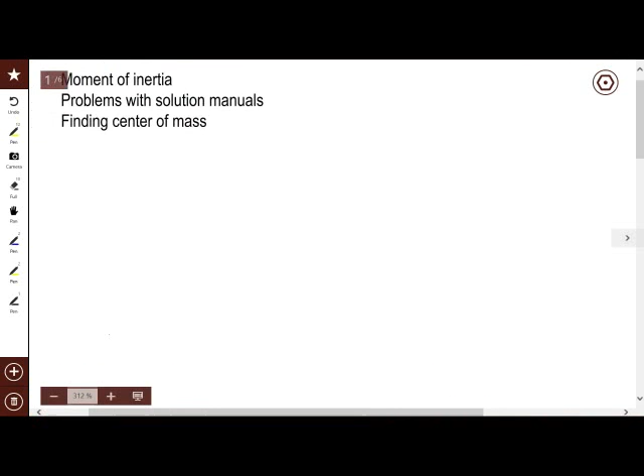All right, let me ask you some things here. If I were to take a mass — okay, if I were to take a ring, a piece of metal, and bend it around, put some spokes in here just so it'll stand up, and put a hub on there, and spin it. This has a radius of, say, 1 foot, 1 inch, whatever, and it's 10 pounds. Can you imagine that?

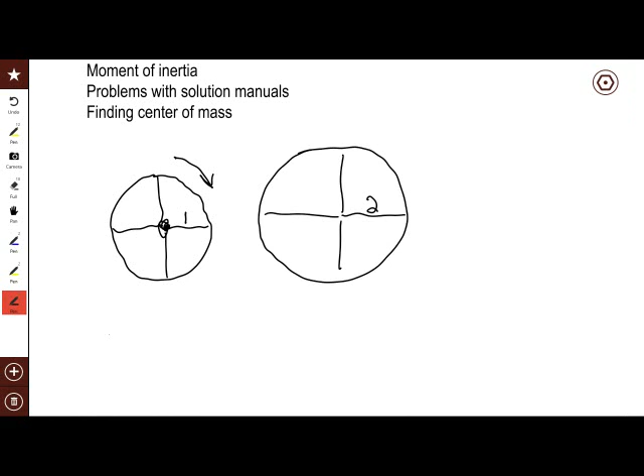Okay, and then what I do is I take another 10-pound ring and do the same thing with it, but this time I have a radius of 2. Does it have a hub? It has a hub just like the other one — I'm not trying to fool you, but good point. So it's got a hub, I'm doing the same thing to it. All right, and here's what I want to know, and if you have your clickers, we'll see what you think.

Number one is the left guy, number two or B is the right-hand guy. What I want to know is which one of these would be harder to speed up in spinning. They're sitting at rest, and you're going to come up with your hand and start turning them. Which one would be harder to turn to get started, the little guy here or the big guy over there? It's the same weight, just a different distance.

Yeah, click in, click in. Tell me what you think. Did it work? Okay, oh yeah. Well, it's a small screen, but anyway. Everybody weighed in?

The left would be number one, and that one over there would be number two, or A or B. Are you turning it from the edges? Turn it from wherever you're going to turn it, you turn it the same way, whether you're on the rim or in the center. We're in the center, we're going to grab a hold of it right here, and we're going to go like this.

I'm probably asking it wrong. Okay, so this is going to be mostly a... were you here? Okay, so let's see what y'all are saying, if I can figure it out.

So 65% are saying B. I was hoping for a bigger percentage, right? Here's what's happening: the lighter, the shorter in this way that the mass is, the easier it is to turn. So if you got that one wrong, maybe I said it wrong, maybe I've deceived you somehow. But if you're thinking, wait a minute, that doesn't make sense, come see me after class because I want to make sure you got the right idea.

Which one is easier? You got a 10-pound ring, and it's this big around. I'm going to sit here in the center and start turning it, making it go faster, faster, faster. Then I have a 10-pound ring, but it's twice as big. Which one would be harder to speed up? The one that's twice as big. So if you got it wrong, maybe I just said it wrong. But what I want you to have is a feel for the fact that in order to get these things to start spinning, the distance that the mass is out makes a big difference. Make sense? You probably experienced it, right? The bigger the tire, the harder it is to get the thing moving.

The other thing that will give you a large inertia - inertia is it doesn't want to change, right - so what gives you a large moment of inertia is a large radius, which I just asked you about. The other thing is a large mass. So let's say you've got your arms out here at a certain distance. If I pick up some weights out here and then try to turn like this, it's harder for my body to turn because of the extra weight out there at my hands. That make sense? So you have a feel for what moment of inertia is: large moment of inertia means you've got either big mass or mass at a large distance, one or both, right? You get the idea? So if you want lower inertia to turning, you want to pull the masses in.

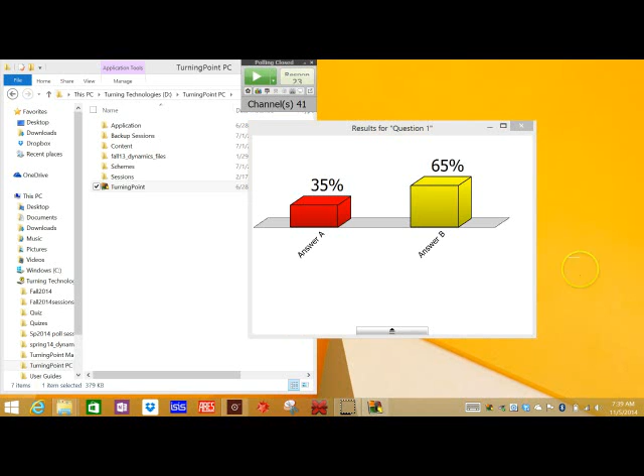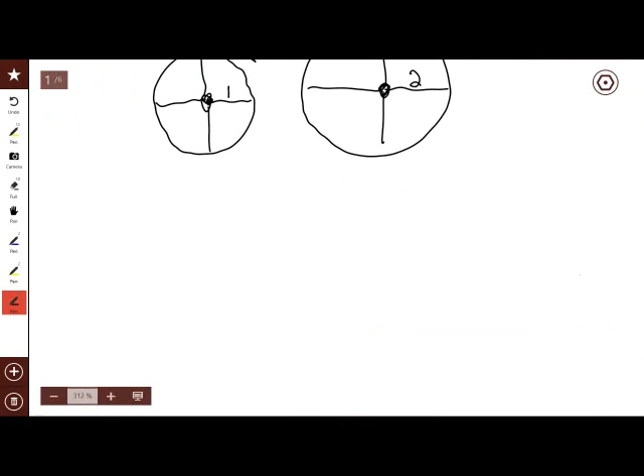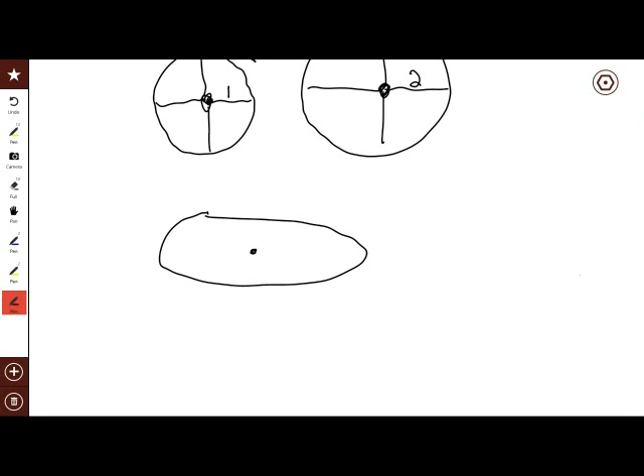Does that make sense? Okay, the other thing you need to know about moment of inertia that people are going to expect you to understand is something called the parallel axis theorem. If you have a body, any body, it's going to have a center of mass. Are you familiar with what the center of mass is? It's a balance point. Do you know how to calculate the balance point? It's the centroid - well, it's close to the centroid, but if you take the centroid and multiply by density, then you get the center of mass. For example, if this is an area, the centroid would be the center of the area, so if you cut it out of cardboard and found the balance point, that'd be the centroid. If, on the other hand, this thing over here was all gold and over here it was all aluminum, it would have a different balance point, wouldn't it?

Okay, center of mass is different than centroid, but they're very similar calculations. Got it? So you know what the center of mass is. You could do it if you had to. I'm not going to put it on a quiz, but you could do it, yes? The way you really do it in the real world is you draw it up in NX and you click a button and it gives it to you. Okay? So I'm not going to beat you with it. But everything has a center of mass.

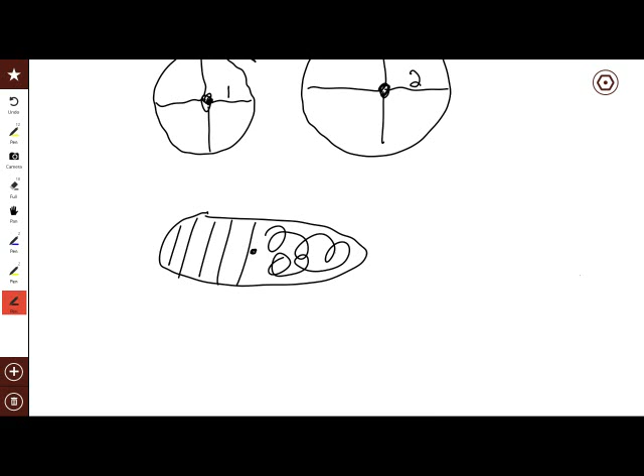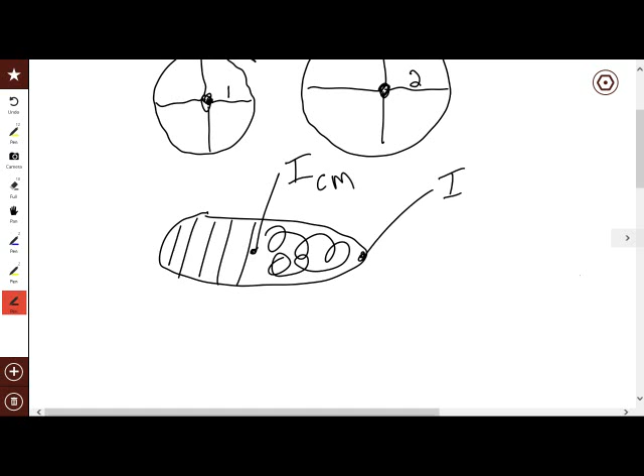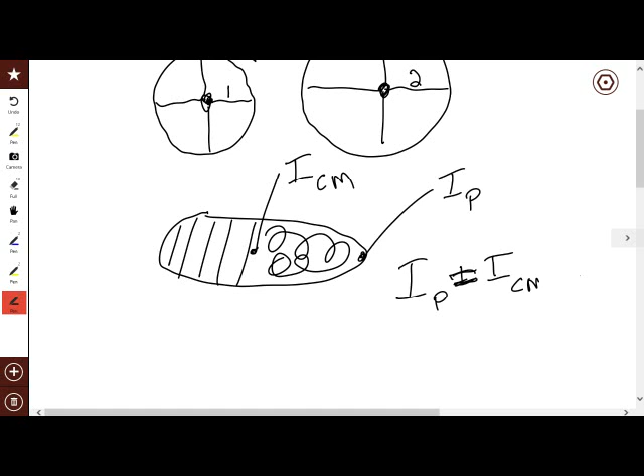Now, if you want the moment of inertia of something, say for example you have the moment of inertia about this point right here, about the center of mass, and you want the moment of inertia around some other point over here, then the moment of inertia around this other point is equal to the moment of inertia through the center of mass plus the mass times the distance squared between the two.

Okay? Not on a quiz, but you better have that in your mind when you go to work, because somebody's going to say something and you're going to say something stupid and then you'll lose your job because they'll say, man, what an idiot this person is. Don't even know how to take 2 plus 2. Okay? It's called the parallel axis theorem. And usually they'll say, well, you can use the parallel axis theorem and shift it over, and you go, right?

You need to say, yeah, I understand. I know, how do you do it? Well, what you're going to do is you're going to do it on NX. That's the way you're going to do it. Right? That's the way you'll actually do it. But you need to know about the parallel axis theorem. People will ask you about that, or they'll say something about it, and you need to sound intelligent. Got it? You will use moments of inertia, especially in Chapter 17.

You'll use them on the test. I will tell you the formulas for them. Okay? You all had Calculus 2, I'm sure, or at least doing it now. And in Calculus 2, they are doing things like having you integrate to get the center of mass, or centroid, or whatever it is, and they're having you integrate to get the moments of inertia. Right? It's agonizing, isn't it? That stuff is, I mean, that's the stuff that I had to do. Man, we don't do that anymore. We just don't. Okay? So why are you taking Cal 2?

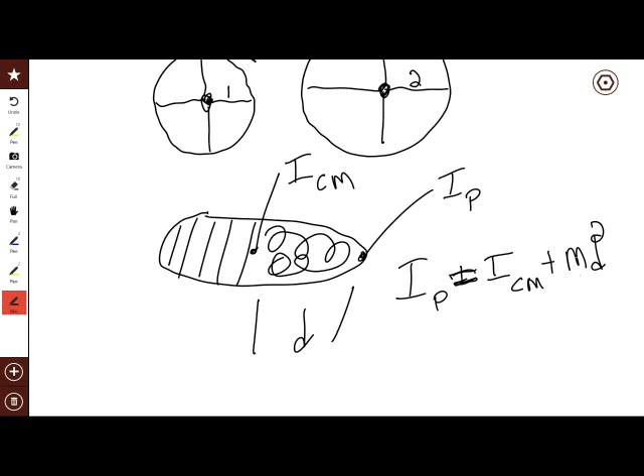Here's another issue, and this is, I could care less if you use the solution manual. I really don't care. You're not supposed to, but I don't care. I'm not going to rat you out. I'm not going to come get you. I don't care. It's a learning tool. Use it. Here's the problem you're going to have.

In Chapter 17, the author does problems different than what I do. I have done it his way. I've done it in classrooms when the professor made me do it, and I've done it in real life. I'm telling you, it does not work. Well, it works. It works. It's confusing for almost all problems.

Very simple little problems that I would make up in a book that I publish, you can use the technique that the author's got. Okay? It doesn't work for everything. Well, it's confusing. See how confused I am already? Right? It's confusing to use that technique.

What I'm going to do is I'm going to do like I've always done. I'm going to say there's one way to do it. Here's the one way you do it. It works every single time. You can do what you want.

So when you're doing your homework, if you got a copy of the solution manual and you open it up and you say, man, this stuff doesn't look like anything Everett's doing, you're right, because I don't do it that way. Okay? If you want to do it that way on the test, that's fine. I'll grade it that way. But the odds are, and I've seen this historically, because I've taught this class for a long time, you're going to mess it up. You're going to try to use it.

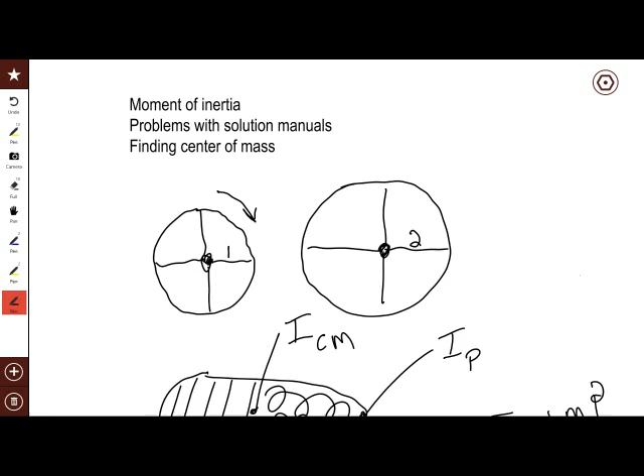Is that good? Okay, all right, so basically the difference in this particular—tell you what, let me just ask you, let's read this problem and you tell me what the difference is. What's the difference between 16 and 17, okay?

So read this. The cart is given a constant acceleration of 6. Determine the force developed in the rod AC and the horizontal and vertical components at the pin B. The crate has a weight of 150 with a center of gravity at G, secured to the platform so it doesn't slide. Neglect the platform's weight. Okay, here's the picture.

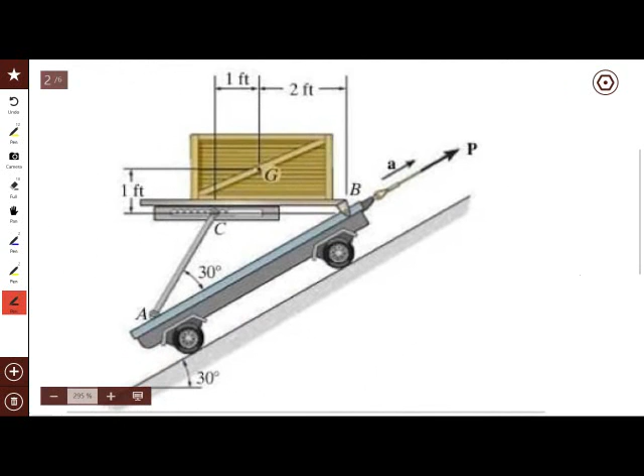Why isn't this a Chapter 16 problem? It wants a force, right? Remember chapter 12 and the difference between 12 and 13? You count the degree of freedom. All right, so by the way, how many degrees of freedom is it?

One, because the cart can go up the hill. Okay, stop the cart from going up the hill, nothing else changes. Okay, what does 1 degree of freedom mean? It means if you give me 1 double dot, I can find all double dots.

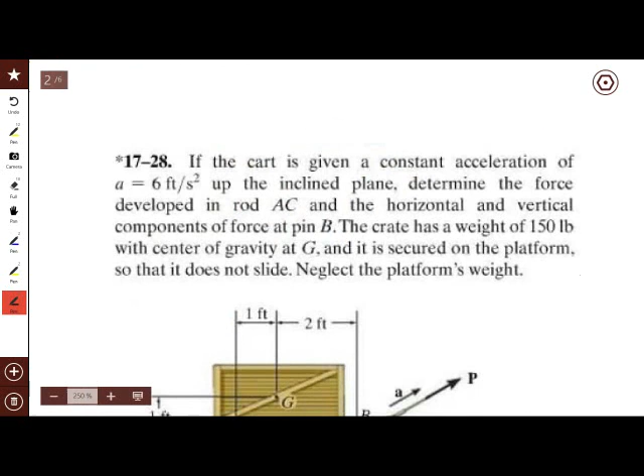Did they give me a double dot? Sure, they told me the A was 6. So I go, hot dog, man, I can get all double dots. That's not what they want. Right? So what do you do when you're faced with a situation like this?

Because you're going to have to select between chapter 16 and 17 on the next test, right? Do I draw a free body? If you draw a free body for chapter 16, you're not getting any credit. It's not like I'm going to dock you, but you're wasting your time. It's not going to take you anywhere, and there's no credit there because you're doing the wrong thing, right?

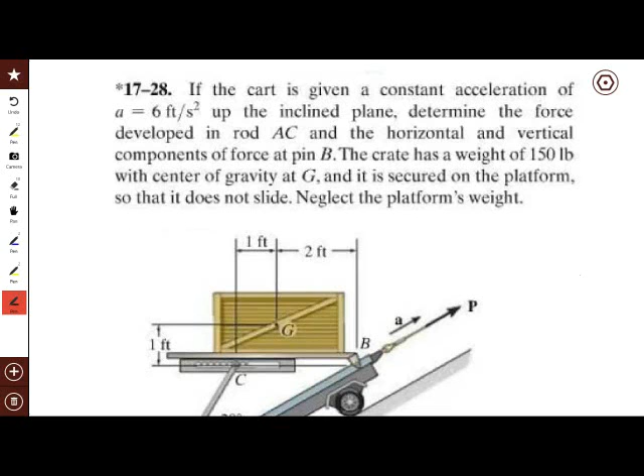So you need to be able to select them. So this one, pretty obvious, okay? All right, so how do you do a chapter 17 problem?

Free body diagram. Okay, so how many objects are there here? What are they? The crate and this body right here, right? Okay, so at most you're going to have 2 free body diagrams, at most, right? Let's see.

Shall we do it? Sure. Okay, which one do you want to take the free body of first? The crate, and I hear the crate, I hear the cart.

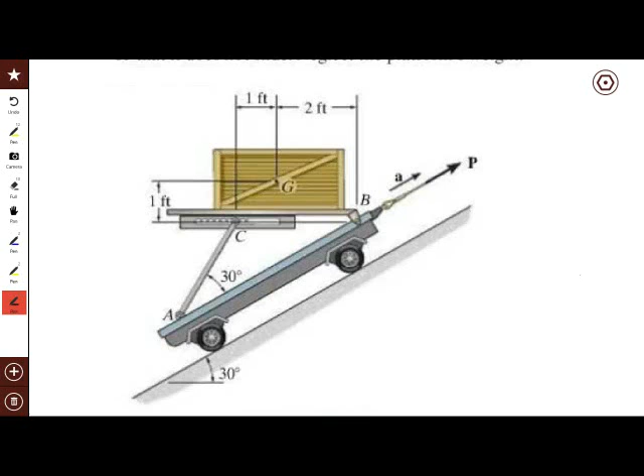Here's what I want to do. When you look at what they want, the force at pin B, that's this guy right here, and they want the force in rod AC. See where that is right there? So here's what I'm going to do.

I'm going to go in there, and I'm going to take a body like this. Okay, everything inside the circle is going to be inside my system. And I'm cutting through pin B. I'm going to try that one.

Why do you think I'm going to do that? Why did I cut it here at pin B? Because what I want is I want the forces at B to be between 2 things. They're always between 2 things. I want it to be between something that's inside and something that's outside. Otherwise, it won't come up in the free body.

Make sense? Really? Right? Okay, why am I cutting this? Because you want that one as well, right? You want the force in this guy.

Now, why do I not cut it at the pin? Why can I cut it here? For example, this would be dumb. See if I can get a different color. This would be dumb to come down here and cut like this. Why would that be dumb?

First of all, it misses B. Tell me about the forces when you start cutting into a big piece of chunky metal right there. You know what they are? Man, you got shear forces.

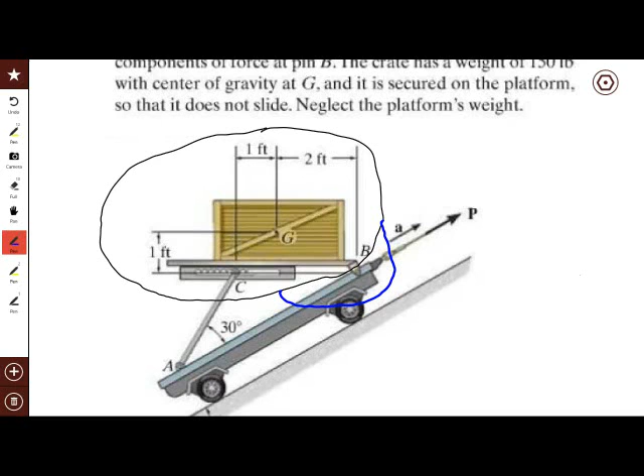Well, it's a 2-force body, but you're right, it looks like a truss, right? It's a 2-force body. Take your pen like this and touch it in 2 places. Now don't touch it like this, because you won't get the same feeling. Touch it in 2 places, one there and one here with your fingertips. What can you do to that? You can't do much, you can push it. Well, if I had glue on my fingers, I could pull it too, right? So you can only do this.

What would happen if it was U-shaped and I could only touch it in 2 places? I could do this, right? The forces that I can apply have to be right between my 2 fingers. See that? They have to go right between the 2 fingers. Now sure, it's going to bend down here, but I'm not cutting a free body down there. I'm looking right up here. It's called a 2-force body, and it's either tension or compression. That's why I can cut through here, because I know the force has got to go between that point and that point, right along that line. You okay with that? Okay.

Draw the free body diagram. Just as a hint, this is a pin, so you're going to have 2 forces there. You could have 2 forces there, horizontal and vertical, or in two directions. So draw me a free body diagram there.

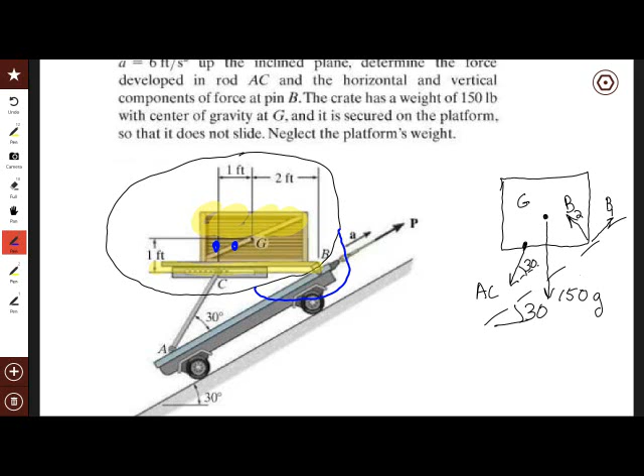It says it's 150 pounds. Is that weight or is that mass? Weight. So should I be taking 150 times G for the gravity? Oh, man.

Here we go. What about those B forces? You like those the way they are? Why not? Why do you want X and Y? Okay, I like that too, because what you're going to have to do, we're going to sum moments. You need to find the moment arm, the perpendicular distance. It's not impossible to find it, right? But do you want to do it? I sure as heck don't, right? So probably not smart, so let's change it, okay?

And what would be convenient? Horizontal, vertical, that sounds good. Is that okay with you? All right, so here's what we'll do then. I'll get rid of those guys. Haven't quite figured out. Oh man, too much. Oh golly. One of these days, man.

There we go. Okay, I'm gonna put them in some other color, just because I don't want to try and erase them again. Okay, so here's a B. Whoops, pick it up. Oh man. Well, theoretically it works, huh? Okay, all right, so I'm going to draw a B1 here, BX we'll call it, and then a BY. Okay, is that good? You like that one better?

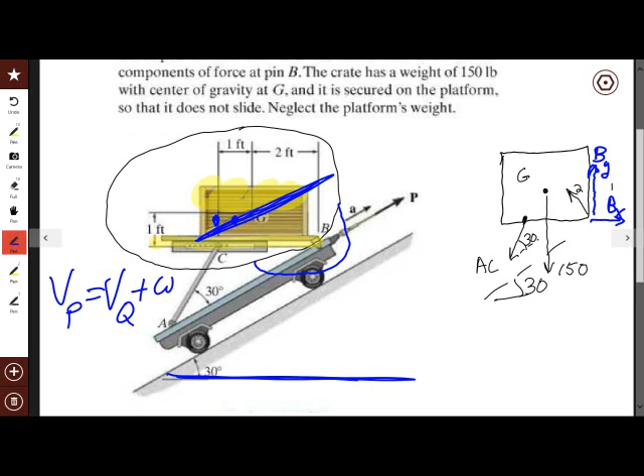0. Okay, so any 2 points on this body, correct? Any 2 points: velocity of P equals the velocity of Q plus omega cross R. What's omega? 0.

Any 2 points, do they have the same velocity? What about the acceleration? Any 2 points, do they have the same acceleration? Why? Because they have the same velocities. Why? It's not rotating, is it? It's not rotating, you see that? So they all have the same acceleration.

Now you're telling me that G's got 0 acceleration? What is this acceleration here? Right there. Yeah, it's 6, isn't it? So how can G be 0?

Now tell me what the acceleration of G is. Nope, why did you say 32.2? Because it's G, right? What did the physicists call that? Acceleration of gravity. And what did I tell you they're doing to us? They're lying to us. That is not G; that is not an acceleration of gravity, it is a force of gravity. And they're trying to confuse us so we don't get our jobs, because they're jealous we make more money.

Remember that? This case right here has weight - believe me, it's got weight. Okay, I got weight too. You see it sitting there? Does it have gravity? It does. But I don't see an acceleration. Is it accelerating? Then G can't be the acceleration of gravity. There's no acceleration of gravity - that's just the name of what they call it. Call it Peter if you want to. Does it have Peter? Yeah, it's got Peter. What is this? Force. Right? Gravity is a force.

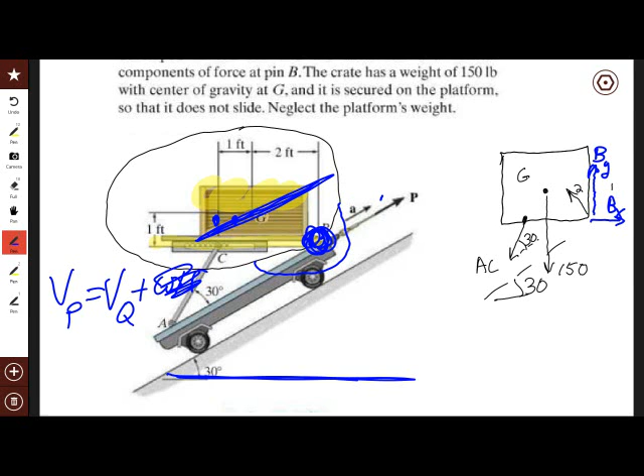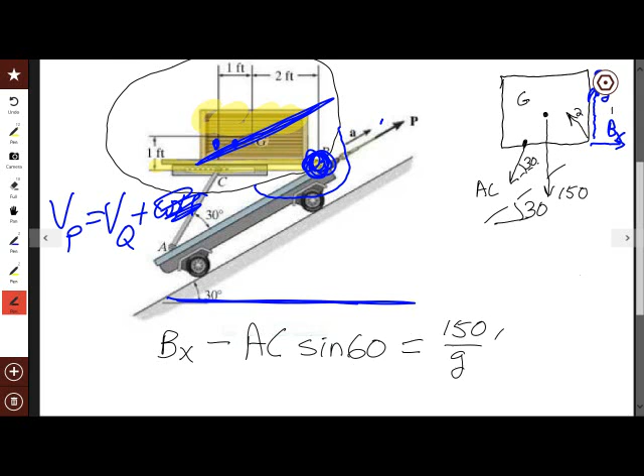Okay, now that you have an idea for the acceleration of the center of mass, tell me what coordinate system you'd like to sum forces in. Tangent normal? R theta? What do you want to sum them in? X and Y? Okay, let's sum them in X and Y. Do it. Y'all get this for the X?

Did I get it right? Shaking your head, you don't think so? I don't swear to it, but I think it's right. Yeah.

Good question. It's sum of forces equals mass times acceleration, right? A in what direction? In the X. Why X? Because I'm summing in the X. Summing forces in X equals mass times acceleration in X. So the acceleration is 6 up the incline, correct? So what's the X component?

Right? Y'all see that? 6 cosine 30? Why is it positive 6 cosine 30, not negative 6? Because it's going up the incline, it's going to the right, accelerating to the right.

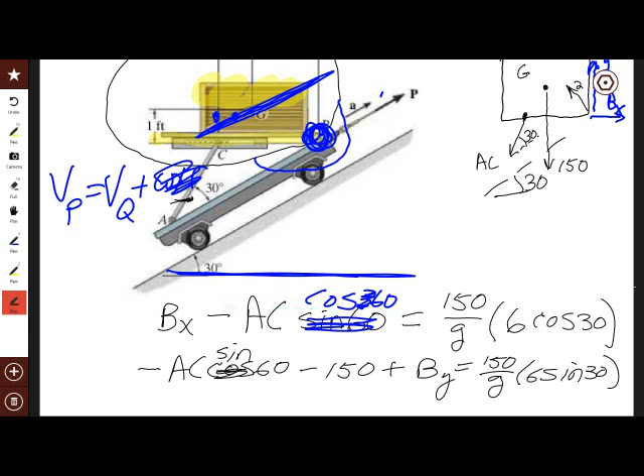You remember how to sum moments? Okay, it's R cross F, or it's the force times the perpendicular distance. Okay, so let me show you how I would do it up here.

Okay, here's what I do. I'm going to find the moment of Bx. So what I do is I come in here and draw a line along Bx. Then I find the center of mass.

Here it is, right there. And I want the distance between that point and that line I just drew. What's the distance? Is it this distance here? That distance right there, right? That's the perpendicular distance from the force.

A lot of times what I see students doing is they say, oh, there's the force, and they'll find the distance from there to there. See that? That's not right. Is that perpendicular? No, it is not. So what you do is you just extend the line for as long as you need it to be, and then it becomes pretty clear that you want the perpendicular distance. So that distance is 1, I think, in the diagram.

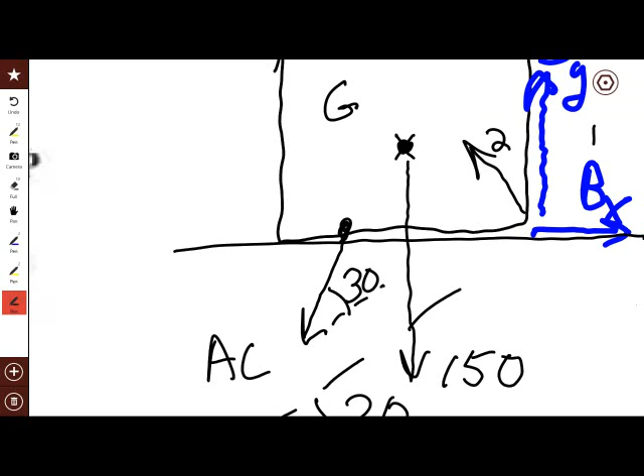Okay, so what's the moment of Bx? I think it's Bx times 1.

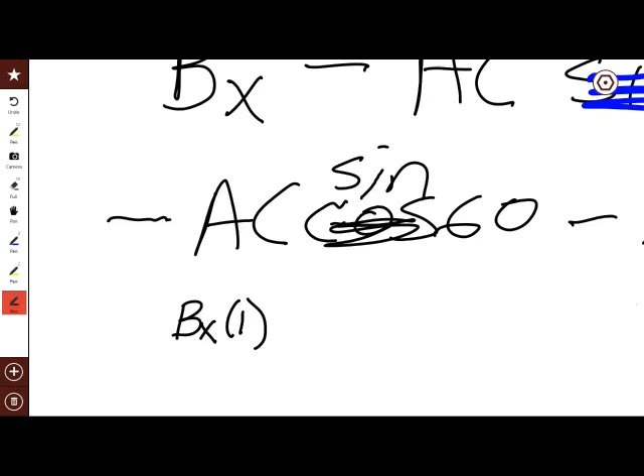Is it clockwise or counterclockwise? Counterclockwise? Okay, now why are we going to choose that as positive? The right-hand rule. I is that way — that's because that's what I always do. J is up, right-hand rule, positive rotation is out. So we're going to say that's counterclockwise. That's the moment, counterclockwise. Can you all see the direction, or should I talk about that?

Think of it as being pinned down, hold it down gently with your fingers at G. And if you pulled on Bx, which way would it turn? It would turn that way, wouldn't it? Okay, so it's counterclockwise, so that's going to be a plus.

Right? Okay, get the By. What's the perpendicular distance for By? It's not the same. Okay, so it would be By times 2. What's the direction, plus or minus?

Okay, how about that AC? What are we going to do with it? What I would do is break it down into two pieces, a vertical and a horizontal, and then do that one. If you're really good at geometry, you can draw a line from here and see if you can find the perpendicular distance. I'm not good at geometry, so I'm going to break it down into two pieces.

Okay, so the vertical piece is AC cosine 60, right? Yeah, AC cosine 60 — oh, I'm sorry, that's a horizontal. Did it again, didn't I? Okay, so AC sine of 60, that's the vertical piece.

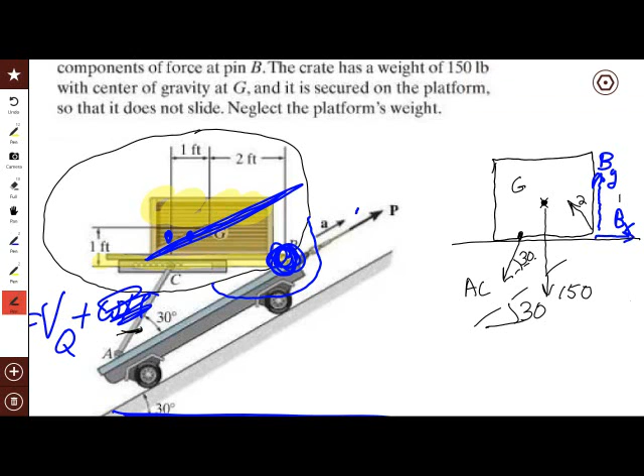All right, so the moment arm is still 1, but I screwed up on this guy. This should be a negative. Okay, now the vertical, right? Now we'll get the vertical. That'll be AC sine of 60, and the moment arm there is 1.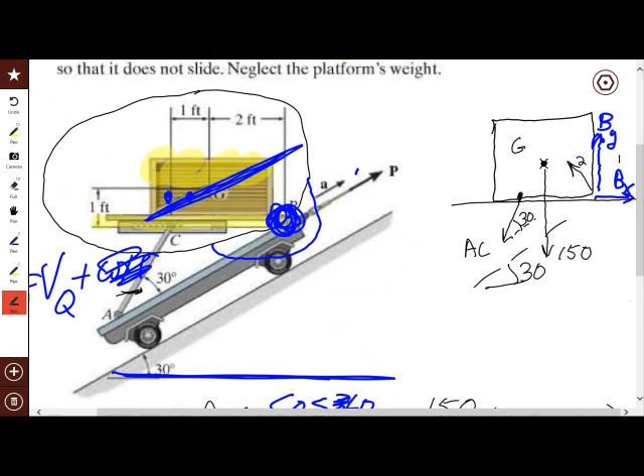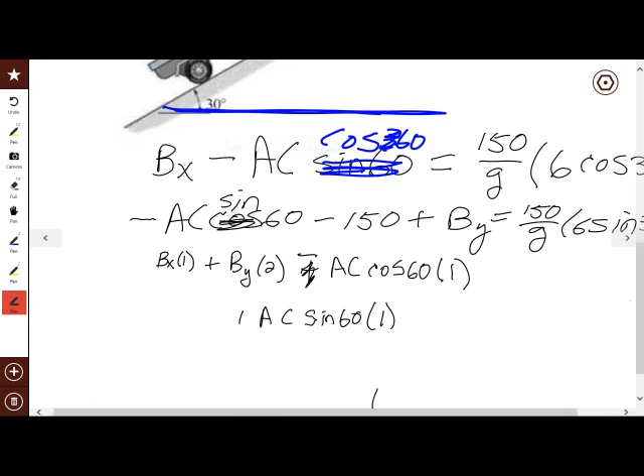In what direction? Anybody else creating moments? I got the BX, I got the BY, I got the AC. What about that 150? Ah, good.

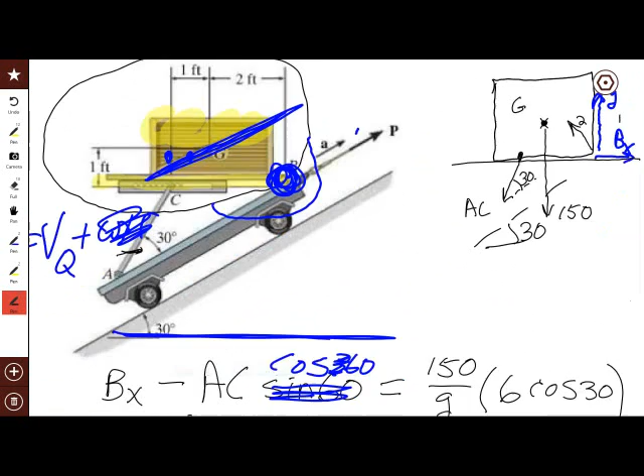Okay, so what is this equal to? Well, according to Newton, brilliant man that he was, this is equal to the moment of inertia of what? Of the crate, of the thing in the free body. Whatever you chose in the free body—if you put 2 masses in the free body, it's the I of both of them. If you have 1 mass in the free body, it's the I, the moment of inertia of that body. Got it? Whatever's in the free body. I, around what point? The same point you're summing moments around. So if you sum moments around B—the wrong thing to do, but if you did, it would be I around B. Where did we sum them? Center of mass. So this would be moment of inertia, usually called I around the center of mass, which was point G.

Times the angular acceleration of the body. So it's like MA, it's I—that's your mass, and your alpha is your acceleration. So it's I times alpha. Why did I put it in as a positive alpha? What am I assuming about alpha? Which way is positive? I'm assuming it's accelerating counterclockwise.

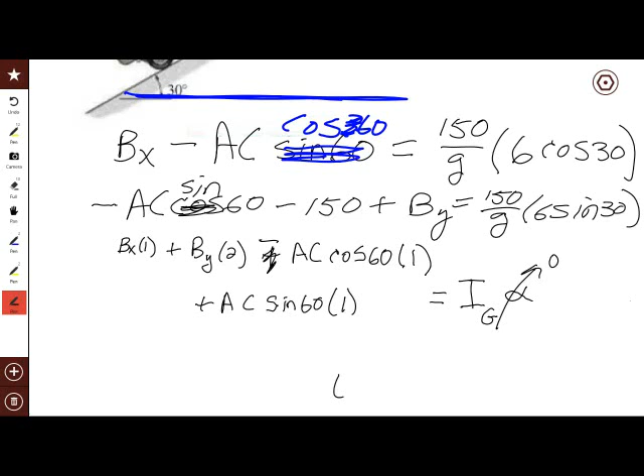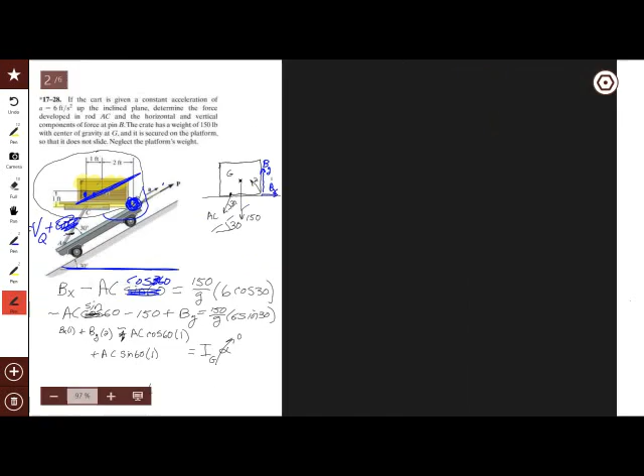Are you saying no? Okay. How did that one get in there? Oh, it's the second one. Yeah, I remember now. That's what happens when you prepare things. It's like, what? Okay.

Let's see if this one's any different. The strut AC can withstand a maximum compression of 150 before it fails. Determine the cart's maximum permissible acceleration. The crate has a weight of 150, center of gravity G, blah blah blah. Okay, what's different about this one?

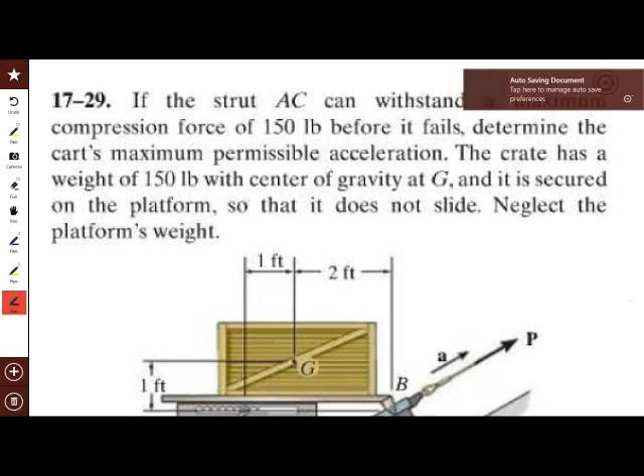How do you know it's a chapter 17? It's 1 degree of freedom, and they're asking you for an acceleration. Isn't that a chapter 16? Okay, what's the degree of freedom? 1. All right, that means if you give me a double dot, I can find all double dots. Did they give me a double dot? That's why it's a 17. See that? That's why it's a 17. I could have done the same thing with this problem over here.

Let me change this problem over here. Here's what I'll do on a test: if the cart is given a constant acceleration of 6, blah blah blah, and the force in the rod can withstand 500 pounds, what's the acceleration of G?

If the cart is given a constant acceleration of 6 up the ramp, and AC can withstand 500 pounds, what's the acceleration of G? Do you need a free body diagram for that? Unless you're worried that the thing might bend or break, then you draw a free body diagram because you want to know the force in AC to make sure it's less than 500, right?

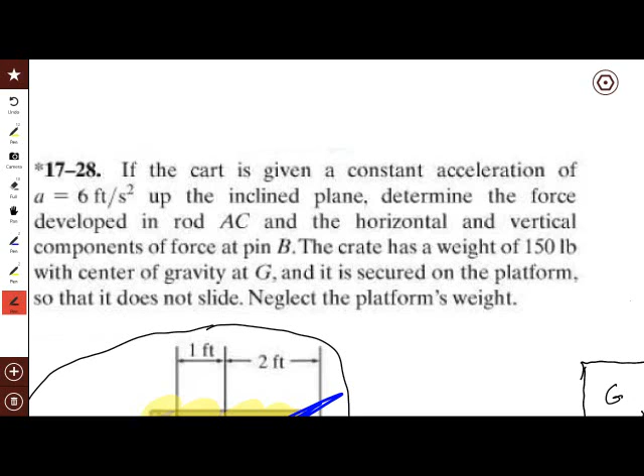But see, I can change the words just very slightly, and I think I can fool you into doing the wrong thing. Don't let me fool you. Got it? And you say, oh, you're just mean. No, I'm not mean. I'm trying to get you ready to be an engineer.

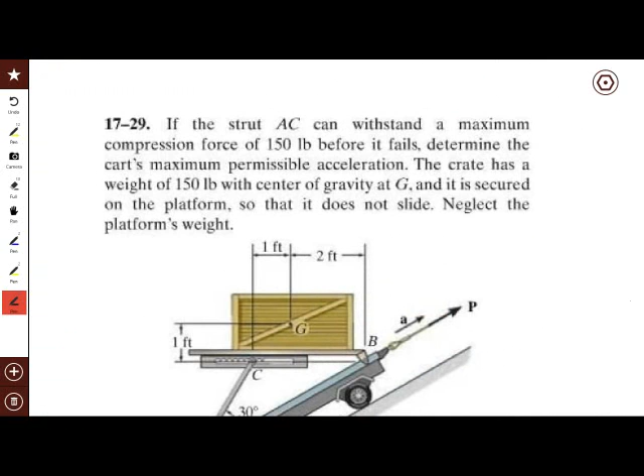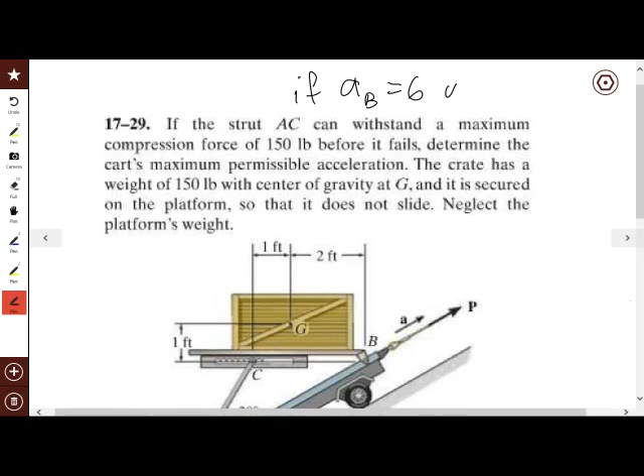So why is this one different? If I were to say the strut AC can withstand blah blah blah, and B is given an acceleration of 6, what's the acceleration of G? Do you need a free body diagram to do that? See what I'm saying? If acceleration of B equals 6 up the incline, what is the acceleration of G?

Unless you're worried about the strut breaking, the answer is 6. You see that? Okay? I hope you can begin to tease out, this is a 16, this is a 17, this is free body, this is no free body. Yes or no? No? Okay, come see me in the office. You're staring at me like I'm an idiot. And I know I'm an idiot, but don't stare at me.

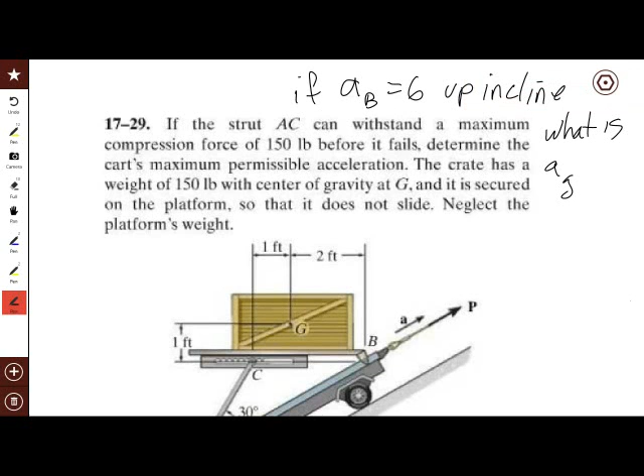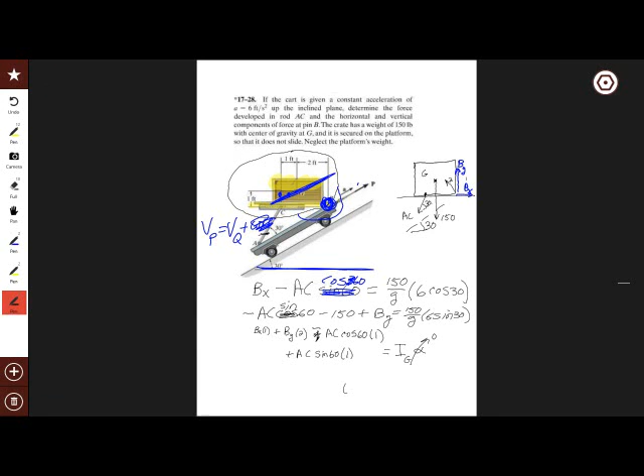Is this problem really much different than this one? You're going to do a free body. What's the free body of? Of the box, right? You're going to sum forces. You're going to sum moments. What's different here as before?

Let's see if I get my highlighter. Here, we knew this was 6. Now it's A. Over here, we were solving for AC. What is it now? 150 or whatever it was, the load that it could handle. And you know it's compression. They said it was compression, right? So for this guy, this would be plus 150 or whatever the number was.

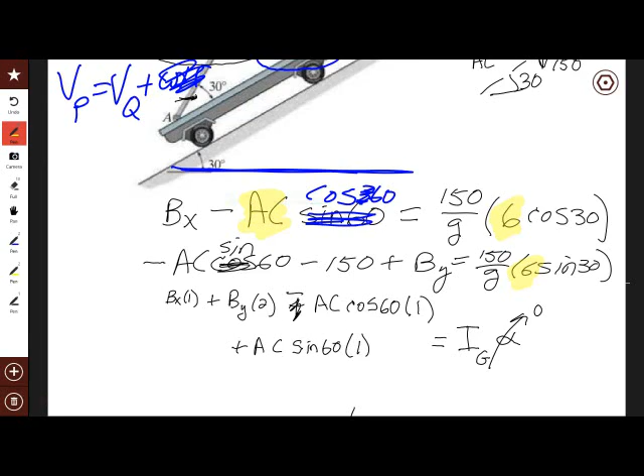Is the problem any different? Do you really want to do it? No. It's the same thing. The equations are going to be the same. You got it? The procedure's the same. It's just a different unknown. Okay, how about this one?

Trailer with its load has a mass of 150 kilograms and center of gravity blah blah blah. If it is subjected to a horizontal force of P - oh, by the way, I say center of gravity a lot, and the book says center of mass. They're not exactly the same. The only way they would be different is if the G changes.

How would that happen? If you're building a huge structure, something like the space station, it's pretty big, and you're flying it so that part of it is in one G and the G down here is different than the G up here, the center of mass won't be the same as the center of gravity, okay? But, I mean, okay, maybe you'll be a rocket scientist, I don't know.

But it's the center of mass, I get sloppy. It's the center of mass that you need, not the center of gravity. Just like the centroid is different than the center of mass if it has different properties, like half aluminum and half steel. Then the center of mass will be different than the centroid.

Trailer with the mass blah blah blah, center is G, horizontal force at P, determine the trailer's acceleration, normal force on the pair of wheels at A and B. Okay, how do you do this? Degree of freedom, very good. It's always the same. And really, you should be getting bored, you should be yawning. What's the degree of freedom?

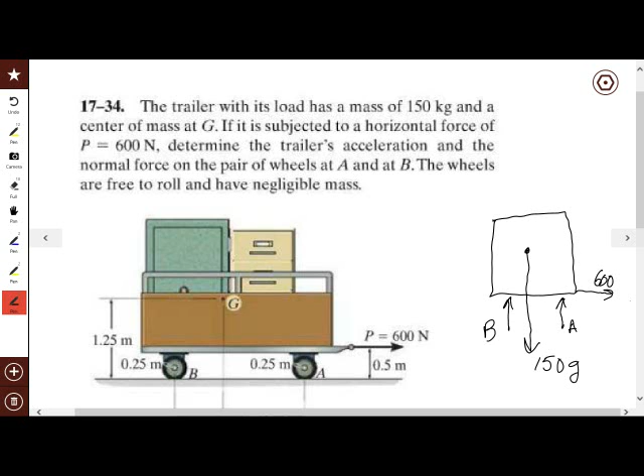Oh, which way you want? Oh, I'm sorry. Did I do it right? Hope so, I hope I'm doing something right.

How come you have an A and a B? Exactly, why do they go in there? Because what's in the free body is the wheels and the cart, all that stuff, nothing else. So A is the normal force between the tire and the floor. The floor's outside, the tire's inside. B is the same reason. Okay, 600, somebody's got their hand on there pulling it. They have to, they didn't show it to me, but the forces just don't magically appear. They've got to be between something.

Okay, now what? Sum forces. In what direction? Tangent normal? R theta? X and Y?

How come? What made you make that decision? Because all the measurements are... No, that's not why. Because the acceleration, right? Forget the measurements, you can get measurements, those are easy. What's hard in real life is finding the accelerations. That's what's hard. So you should practice saying, well, where's the acceleration? What is the acceleration? What's it going to do? Of what point?

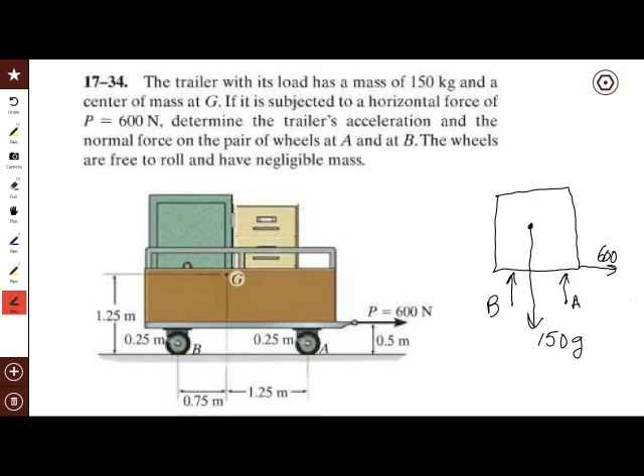The center of mass. Okay, so think about the center of mass. What is the center of mass doing? Horizontally? Okay, so that looks to me like that's an ideal I and J sort of thing. So we're going to sum forces in I and J. And thank goodness the dimensions work out too, but that's not why I made the decision. Okay, sum forces in the X.

Did y'all get that one? How about Y?

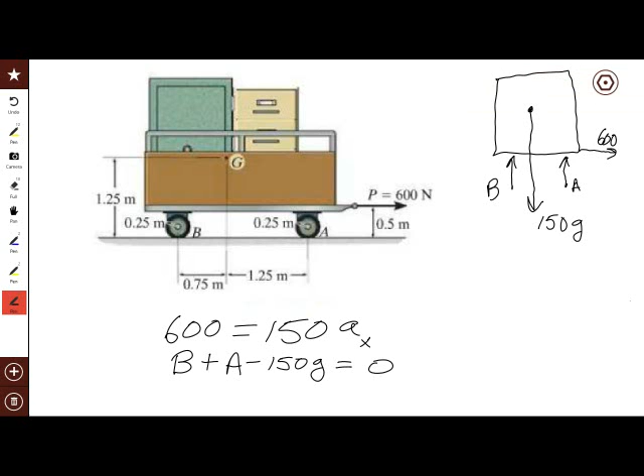Did you get that? Why is it 0? Because it's going horizontally. So write the position. Position is equal to a constant plus x. Right? Take a derivative, derivative of a constant is 0. So everything in the vertical is going 0. It's very common for students in dynamics to say something's got to be 0, and you start throwing zeros in for accelerations. Don't do that. It's rare, it happens, but make sure you know why you're putting a 0 in there, don't just arbitrarily throw one in. And a lot of times you think, oh, the normal forces are always equal to 0 - no, they're not. If you like, I'll give you an example.

Okay, now what are you going to do? Moments. Okay, it'd be nice if I did them around A. What do you think? Why? Because I said not to, right? You can read the book, and the book will show you, oh yeah, you can put in these correction terms. You're on your own if you want to do that.

Okay, I'm going to sum them around the center of mass. Why? Because I can't find a point that has 0 acceleration, so center of mass is always a good choice. So I'm going to sum moments around G. All right, so I'm going to get 600. And which way is positive? Counterclockwise. I is that way, J is up. Right-hand rule, counterclockwise is going to be positive. Okay, so here we go.

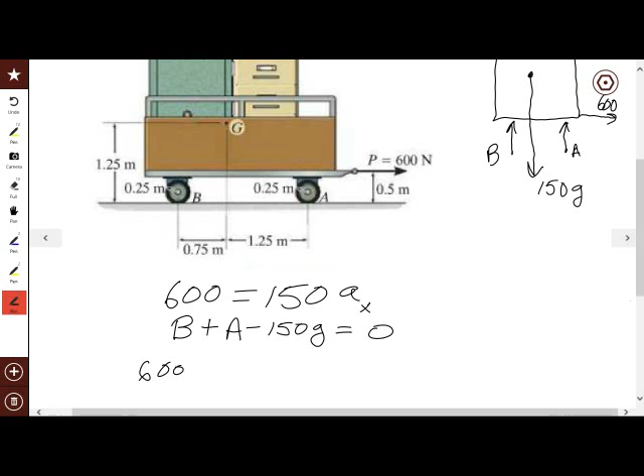I've got a 600, what's the moment arm? 0.75, I think you're right. And positive or negative? Everybody agree it's positive?

Imagine that you're holding it gently at G, and you pull on it with the P. You're going to turn it this way, like that. That's positive. Okay, how about A? What's its moment arm? Looks like 1.25. Positive or negative? Positive. How about B? Moment arm of 0.75. Negative. That equals moment of inertia.

Around what point? Times alpha. Which way do I assume the alpha is going? Positive, because I put it in as plus alpha, I alpha, so I'm assuming it's positive. It's counterclockwise. If I solve for alpha and I get a positive number, I'm right. Get a negative number, I'm wrong.

What is alpha in this case? How do you know it's 0? Because there is no angular velocity. How do you know? Paint a line right here. There's a line on the cart, and a line on the floor. Do those angles ever change? Okay, so it has 0 angular velocity. Does it always never? No, never. Okay, then it has 0 alpha. So this guy here is 0.

The next section, they're not 0. Okay, so how many unknowns do you have? AX, capital A, capital B. How many equations you got? 3. Can you solve it? Do you want me to do it? No.

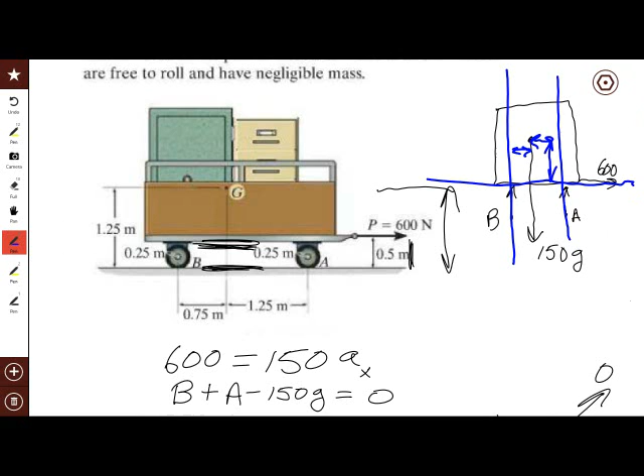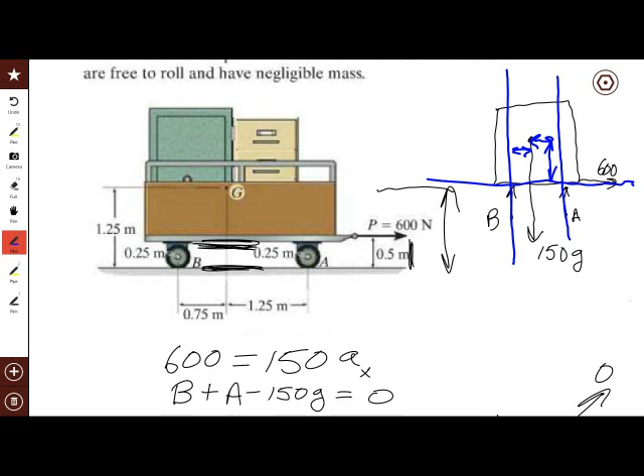If you say, that's not what they taught me, yeah, they did. It's always like that. And then how about the 600? Okay, I'm going to draw a line along the 600, and then I'm going to find the perpendicular distance. And R cross F works if it's like in 3D and you've got weird positions. It's easier to take the R from 3 feet this way, 2 feet that way, and 6 feet up, and then cross it with the F. But for textbook problems, perpendicular distance is usually the easiest. Okay, any questions? Any other questions?

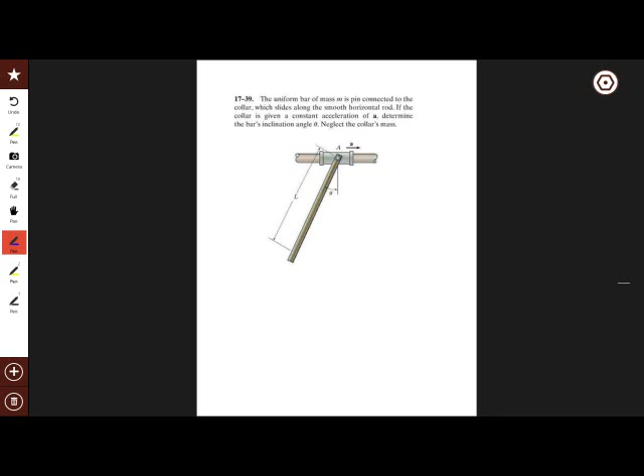Not quite sure how we're doing on time. Oh, okay. Let me slip in something, if you don't mind. This will get you ready, I think. Well, I think it's important.

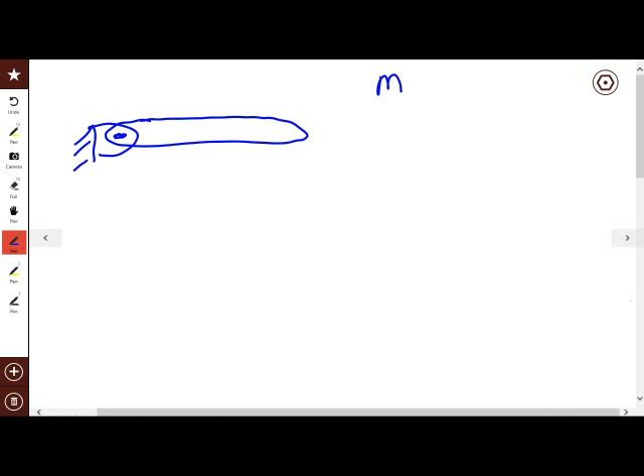Okay, here we go. What if I had something like this? Let's say I had a rod, and I pin it down right here. So basically it's going to go like this and fall. Okay? And I'll tell you the mass, the length, and I'll tell you the center of mass is right here smack in the center. I'll tell you all of those things, right? How big it is and everything else, all the things you want to know.

Here's what I'd like to do. I'm going to release it from rest. I'm going to hold it out there and then I'm going to let it go. I'm holding it with my hand, then I'm going to let go, and it's going to fall. What is the angular acceleration right when I let go? Okay, good guess. Anybody else want to guess, or you want to figure it out?

I warned you, right? Be careful, because you're going to say, oh, this has got to be 0. Okay, well, if alpha were 0, it has no acceleration. If it has no acceleration, angular acceleration is the change in angular velocity, correct? So you're telling me it has no change in angular velocity, correct? So what's its angular velocity when I let go? Nothing. It doesn't change. Have you ever seen them go like that?

Magicians do that, right? Ooh, come on. They're fooling you. Is it stay like that? No. Can the angular acceleration be 0? No. Be careful. I warned you, right? You're going to say, oh, it's got to be. Well, no, it isn't. How are you going to figure it out?

Is this in chapter 16 or chapter 17? You're staring at me like I'm speaking Greek. I'm not, it's not Greek, it may not be English, but it ain't Greek. I know that. So you say, well, let's figure it out. Is it chapter 16 or 17? How do you know?

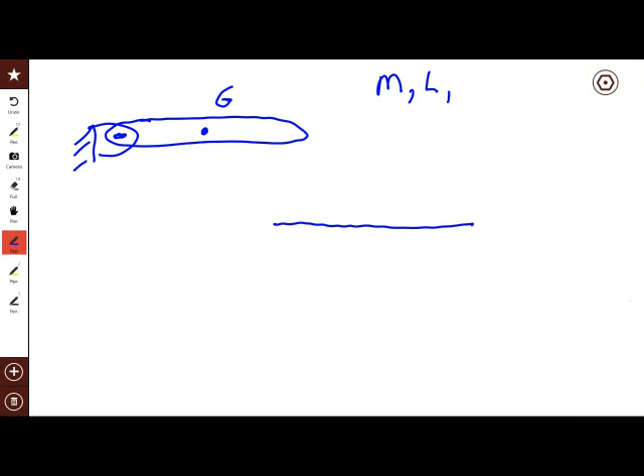Okay, here we go, I'm going to simplify it a little bit. There's the body. What kind of forces do you have back here at the pin? It's a pin, right? Could be vertical and horizontal for all I know. In a moment? Well, it's a hinge. So can it hold me up? No, so it's going to fall. So is there a moment back there? Okay, so I have a, let's call that point A.

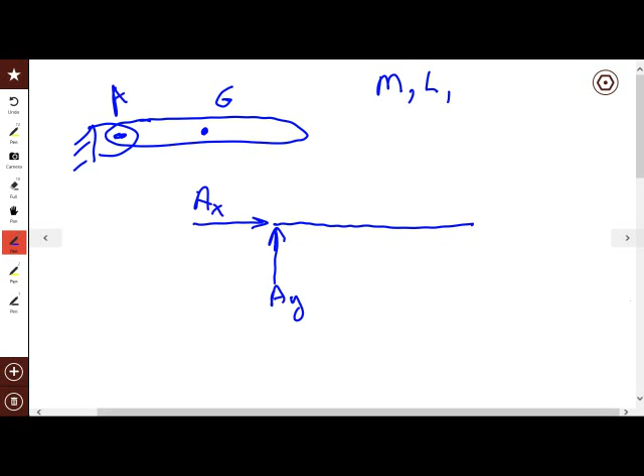So I could have an AX, or an AY, excuse me. Which way am I thinking it goes? Up? Okay, I have no idea what it does. Here's an AX. If I solve for them and I get positives, then I'm right. If I get negatives, I'm wrong.

Where are the other forces? Got any other forces on there? Center of gravity, and what do you got there? Wait, mg, right? It's not an acceleration of gravity that it has, it has a force of gravity. That's what it's got, right? Okay, anything else? What are you going to do?

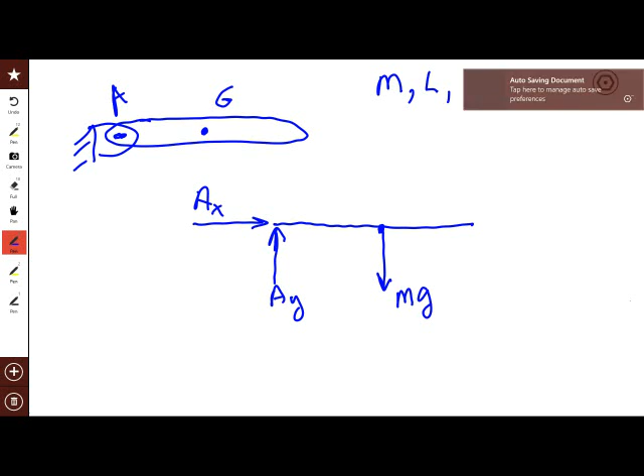Some forces? Okay, in what directions? Is it going to be X and Y? That's fine, we'll do X and Y. And why are you saying X and Y? Because the forces are all X and Y? Oh, no, we're not doing that. What are you going to do?

How are you going to find the acceleration? Let's think about that. Are you going to use a loop? You're going to use tangent normal? You're going to use special points? I'm going to use special points.

Now, if you say no, I'm going to use tangent normal, if you can visualize it and say, man, I'm going to use tangent normal, okay, that's fine, I won't get mad at you. But you got to think it through and say, what is it you're going to do for the acceleration? I'm going to use special points. That always ends up in I's and J's, right? Because I'm going to do cross products and all that kind of mess. So I'm going to pick I and J. That's why, not because the forces are lined up, but because of the accelerations.

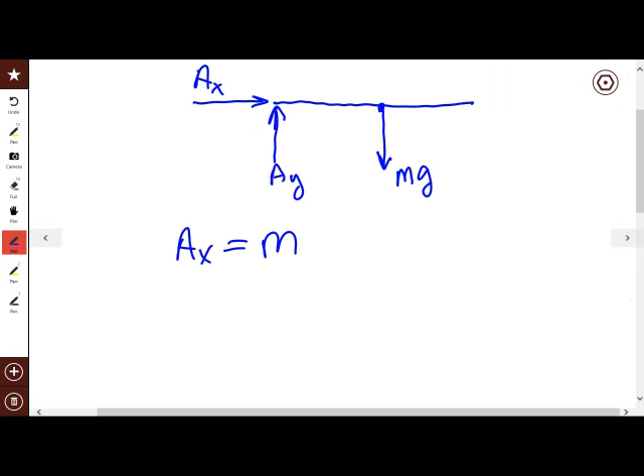Okay, so let's sum forces in the horizontal. AX equals mass times the acceleration of point G, this is point G in the X. Sum forces vertically. AY equals, whoops, minus mg, whoops, mg equals mass times acceleration of G vertically.

Now, which way did I assume AGX was? To the right. I really don't know what it's going to do, but all right, I'll get a plus or a minus and then I know. What did I assume about AGY? What did I think it did?

Did I put in a minus MA? Okay, what am I saying? I think it's going up? Now, if I get a positive here, what do you think I'm going to do? I'm going to say, ooh, I made a mistake. Right? Because anybody knows it ain't going up. Or is it? You could be doing a really complicated problem.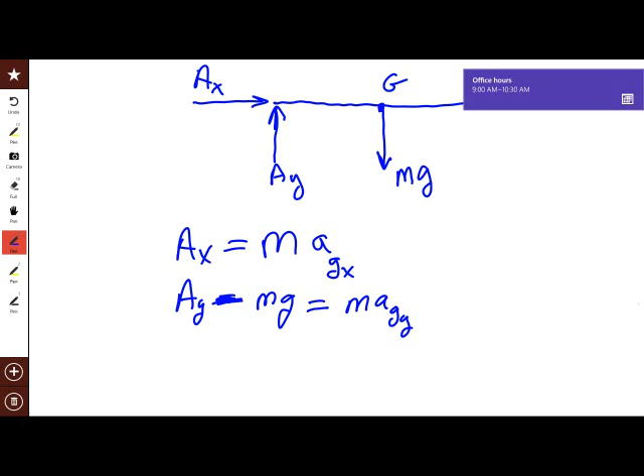You say, I know it's going to the right, and all of a sudden it goes, no, it's going left. And you go, huh? What? Oh, that's right. Yeah, okay. So it doesn't mean that you made a mistake. It just means either your logic's not right or whatever. But in this case, it's so simple. If I get a positive number on that, I'm going to go back and look for the mistake I made. Okay, alright, now what do we do?

I've done two already. Moments about where? G? Is that really where you want to do it? Why? Can you do it around A? That's the first question.

What does it have to have? No acceleration. It's a special point, right? Isn't it in permanent contact with the ground? Then tell me about the acceleration. Same as the ground. Does the ground have acceleration? No? Okay, then can I sum around A? Is that smart? Yeah, because like in statics, you got two of them, they disappear. Okay, let's do it around A.

Okay, so I have mg. Let's say this is a length L. So G is right smack in the middle. It's a nice uniform rod. MGL. Y'all agree? Positive or negative moment? It's going clockwise, correct? I is that way, J is that way. Positive is counterclockwise, so it's going to be a negative. Anybody else have moments? Okay, and this equals I A alpha, right?

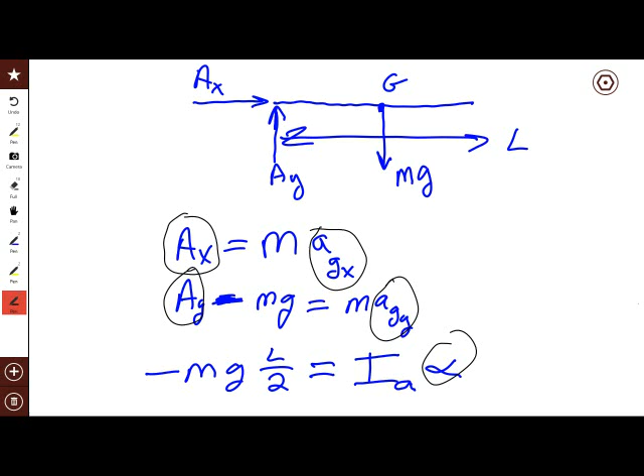It's exactly what it is. Okay, so there is an equation that will tell me what those two accelerations are in terms of the third one. So in other words, I'm going to write AGX equals blah blah blah blah blah, AGY equals blah blah blah blah blah, and it'll have alpha in it. See where I'm headed with this? How do you get those equations? From the loop? From the rope?

Special points. How many special points you got? What are they? G and A. How many equations you going to write? One. It's going to look like AG equals AA plus alpha cross R minus omega squared R. Got it? Okay, that's where we're headed.